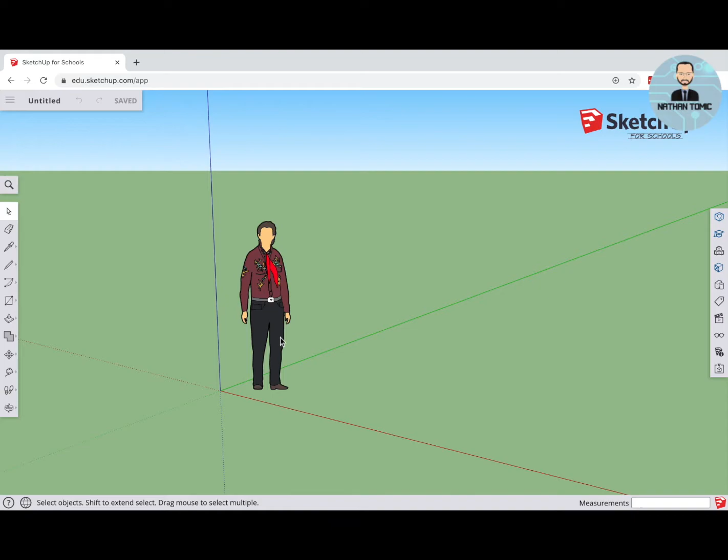When it does load, you'll get this interface here. The person in the center here might look a little bit different, but you generally get somebody, and that person is just a model in SketchUp themselves, designed to give you a little bit of perspective as to size. It's very easy when you start modeling to not know how big something is, and if you were designing for a real purpose such as 3D printing or a plan for something, having scale is very important, and we will talk about that in a future video. But for now, I'm going to click on him, and I'm actually going to press delete to remove him.

Okay, starting with the top left-hand corner, we have what is essentially our file menu. So if we click on these three lines, we get a menu very much like a file menu in Word or something else, where we can create new things, open up existing projects and so forth.

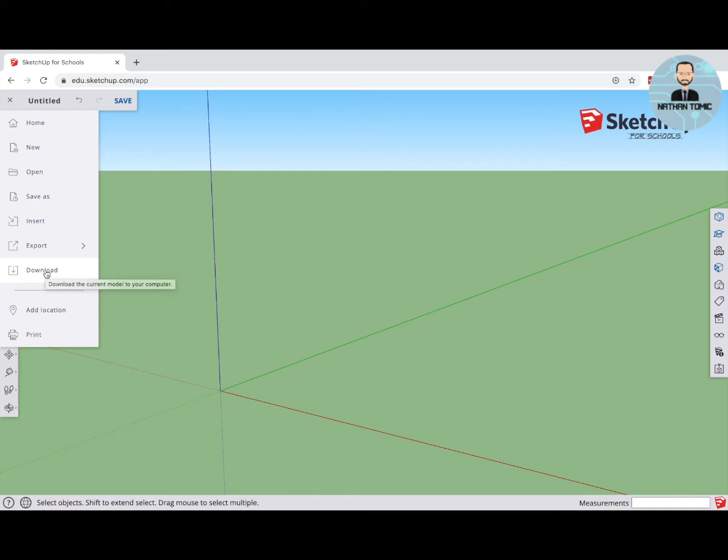Again, if we save, we'll be saving to the cloud, to the OneDrive system, but you can export or download a file to have it actually on your computer, and this is important for when you need to submit work here at school, because we will need to submit an actual file and not just a link to something. Also, when you do save, you get the opportunity to give a name. So this untitled is referring to what my product is saved as. Because I haven't officially saved this yet, it still says untitled.

Over on the right hand side, we'll just point out that there are some menu options here. Probably the most important one to begin with is the second one, which is called the instructor. And if I click on that, it opens out an instructor that basically explains the tool that I'm currently using. I have the selection tool chosen, and it's basically giving me a very quick example up the top and some ideas about how I can use that tool, including some special keys that might be useful for me to change the way it works. So the instructor is a great place to look when you're not sure about a new tool or a new feature.

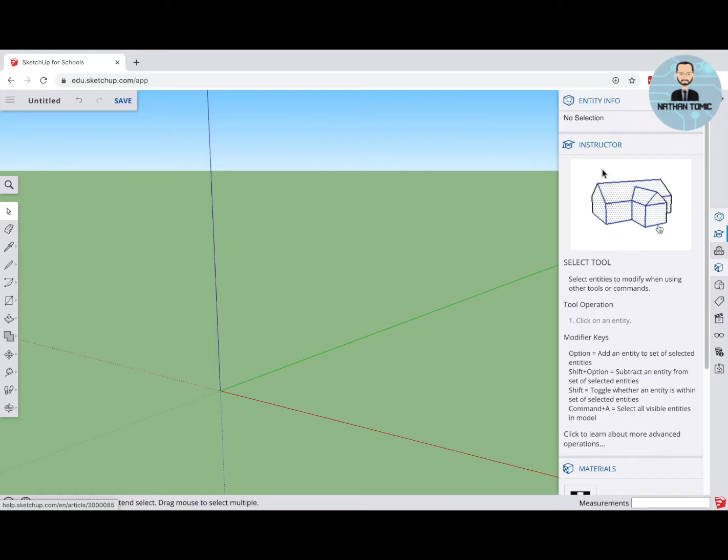If you're able to leave it open, it is very useful, but often on a smaller screen, you might need to get rid of it for some extra storage or some extra space. So you do that by clicking this little arrow up in the top right, and it will just hide that panel. In fact, each of these different options down the right hand side open in that same panel, and you can just scroll through them.

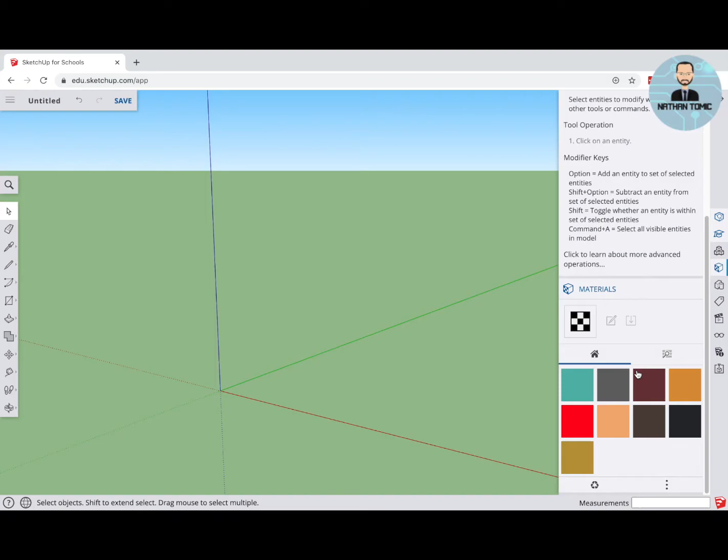So some of the others that might be useful to you early on will be the ones to do with materials, where you can choose colors and so forth for the things that you're making. So it's essentially like painting your models that you make. You also might be using the display a little bit, so you can hide and show different objects that you make, and that can be really useful when you're trying to do a little bit more delicate work. You probably will also do some grouping, so being able to use things like the components might be something that you use as you start designing things a little bit more complex. The other ones you can explore or will look at as they become useful.

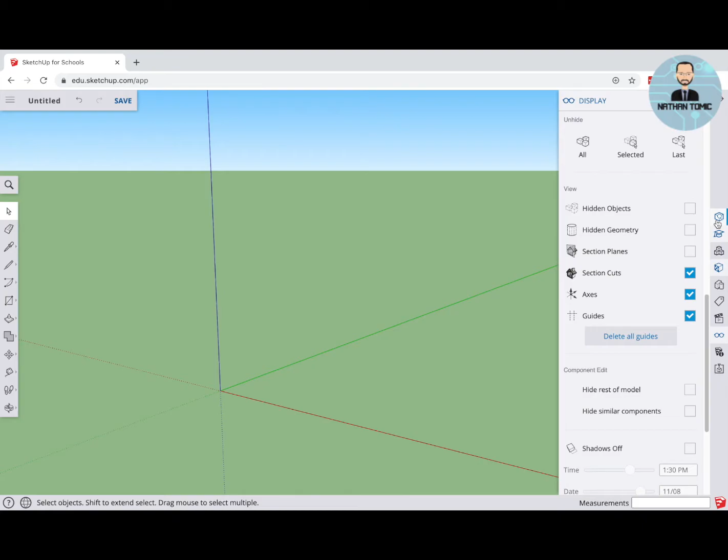Over on the left-hand side, we have our main drawing tools and tools for manipulating what we design. We've already mentioned the selection tool up at the very top. Then we have an eraser as our second tool to remove things from our model.

We then get down to this third tool, and we'll notice that it has a little arrow on it, which indicates that when I click on it, it gives me some additional options: a paint bucket and a sampling eyedropper—a bucket for painting those material colors, and an eyedropper for selecting an existing color or material.

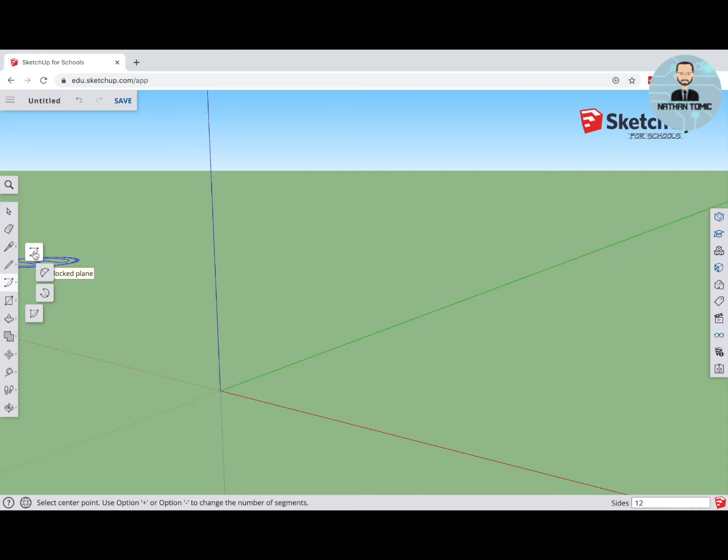We then have a drawing tool, so we can have a straight line or a freehand line. We have an arc tool for different curves and shapes. We then have a rectangular tool, which lets us do rectangles, circles, and other sorts of polygon shapes. It also has a 3D text option.

These first tools are very similar to tools you may have seen in any sort of drawing program, so you might be kind of familiar with some of these. For example, if we take this rectangular tool, we could draw a rectangle on our screen, and it's kind of similar to what you might have seen in another drawing program.

The next tools, however, give us the 3D aspects. The next one is probably the most important you'll use—it's called the push-pull tool. It also has some options: push-pull, follow me, and offset. These are what allow us to create three-dimensional shapes.

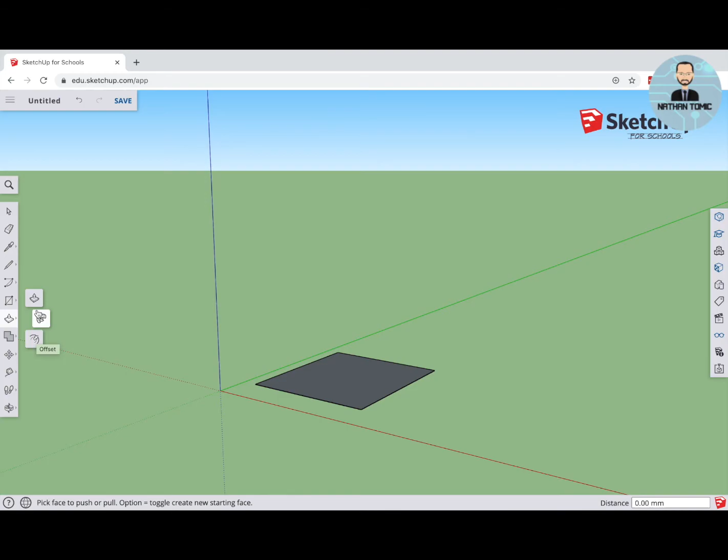If I take my push-pull tool to this shape, I can click and drag to create a three-dimensional shape. That is essentially how we design in SketchUp: we create 2D shapes, then push and pull them to create 3D. It's very much like sculpting with clay—you can add or subtract from an existing shape.

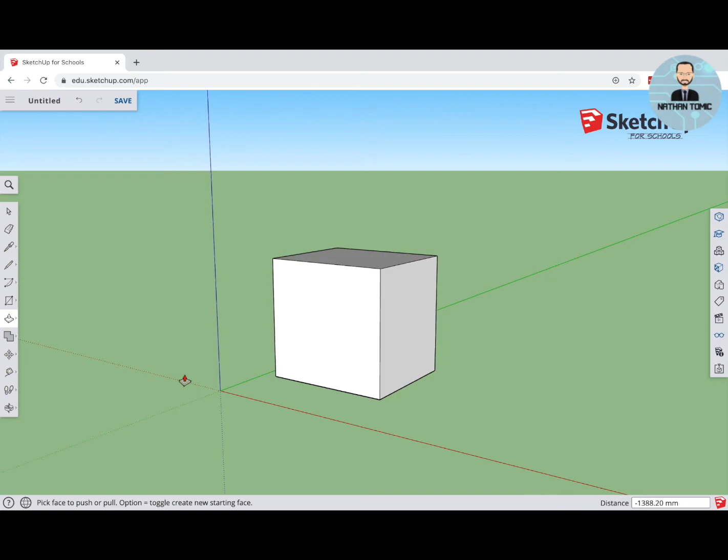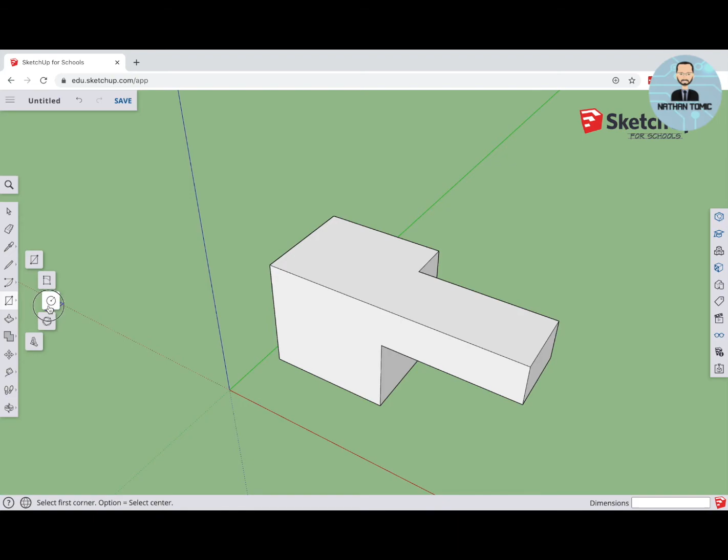I could very easily draw another shape in this corner, and then using that shape, push out a section, essentially removing part of this shape. Once I've got that shape, I might decide to bring it out here instead. We can keep going, adding and subtracting from an existing shape until we're satisfied with what we need.

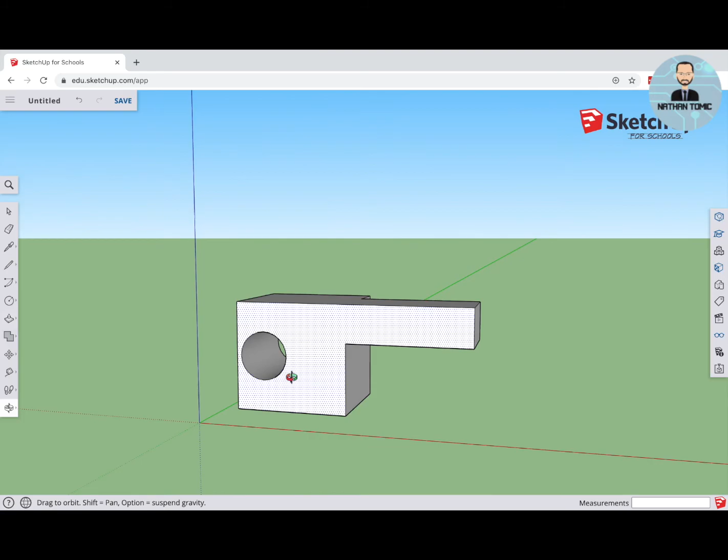So here I have a circle, and if I push and pull that out, I can bring it all the way out the other side, or bring it so it's level and create a hole I can see through. Very simple shapes that you're familiar with become very powerful as we push and pull them.

Underneath that, we have another tool called Outer Shell, and that's useful as you get a little more complex, but probably won't be used very often.

Then we get down to movement tools, so we can take objects and move them. That looked a little bit like push-pull actually. Let's just select a whole section, and we could use this to move it in 3D space.

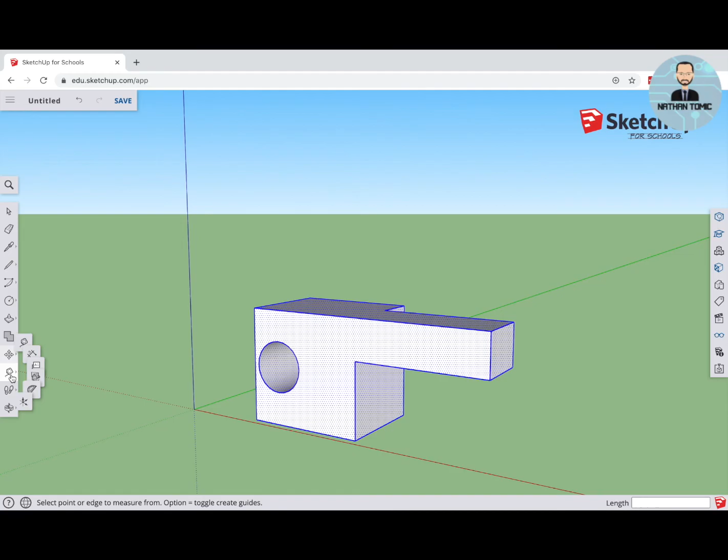We have a measurement set of tools, so we can set measurements and show dimensions. This one here is very useful when you start drawing plans for maybe woodwork, because you can draw your model and know what the measurement should be.

We have some tools for moving around our shape, and we also have these orbiting and adjusting tools. This is what we would use to rotate around, to zoom in and out, etc.

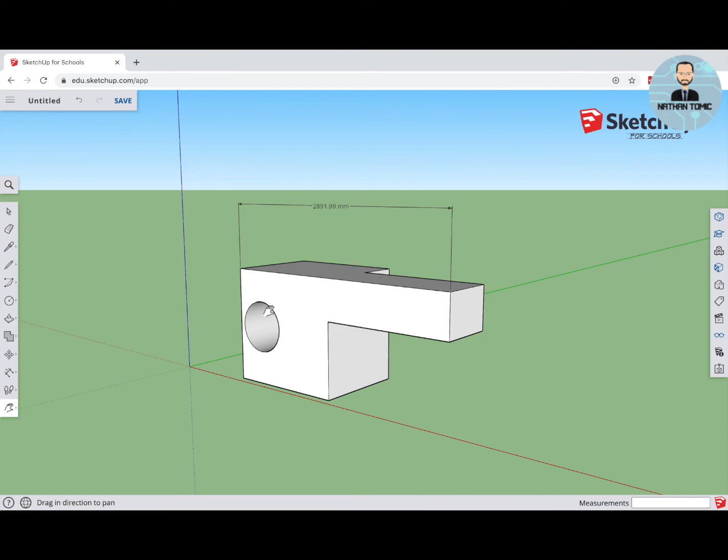Now, while we're talking about these tools, it brings up another important point. While you certainly can use these tools to move around the space and how you look at things, I strongly encourage you to get yourself a mouse if you don't already have one, especially one with a wheel, because that center wheel can be used to roll in and out.

Basically your zoom can be rolling in and out on the wheel, and if you click and hold down the center wheel, you get your pan and rotate. It's a lot easier to pan, rotate, zoom in and out, and even draw shapes with a mouse than with the touchpad on your computer. They don't have to be expensive, fancy mice, but an actual mouse with a center wheel makes working in SketchUp a lot easier.

So that is the main tools and layout of the interface you're going to use. As I said, we're not going through in any detail in this video about how to design and use them—it was really just a look around to see where things are. As we use each new tool, we'll explain them in more detail, so make sure you follow through with future videos.